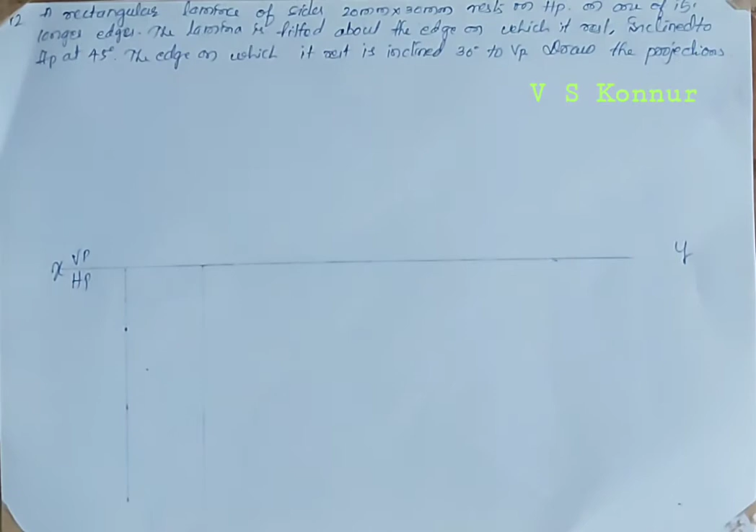A rectangular lamina of size 20 by 30 mm is resting on HP, on one of its longer edges, that is the 30 mm edge. The lamina is inclined to HP at 45 degrees about the edge on which it rests. The resting edge is inclined 30 degrees to VP.

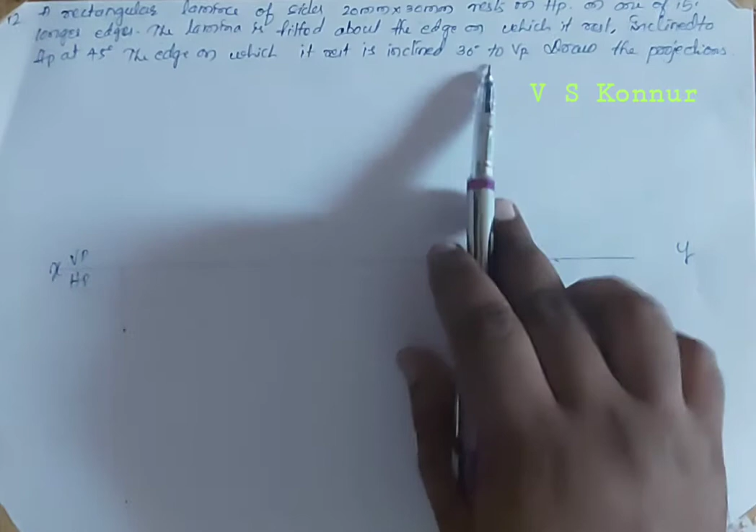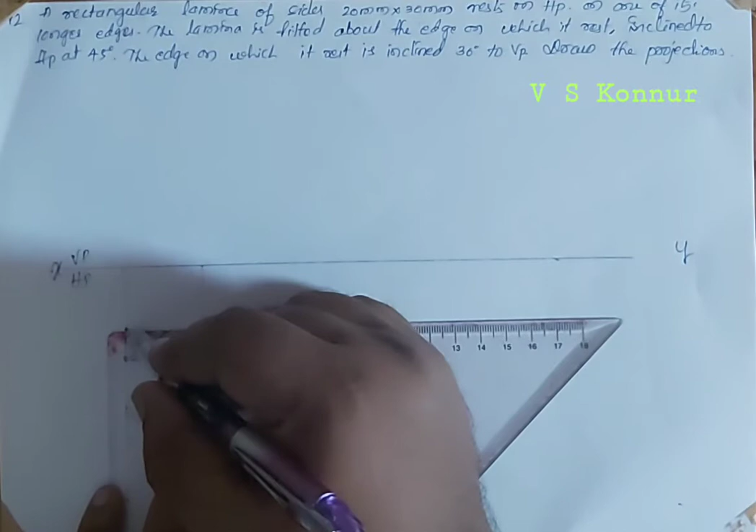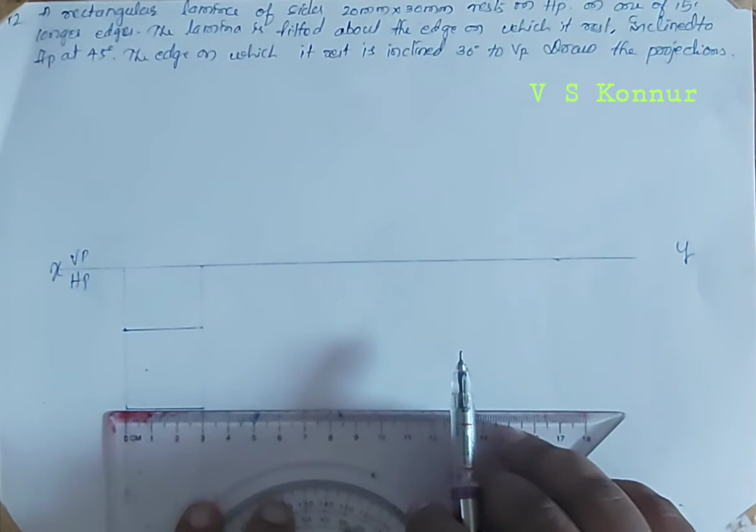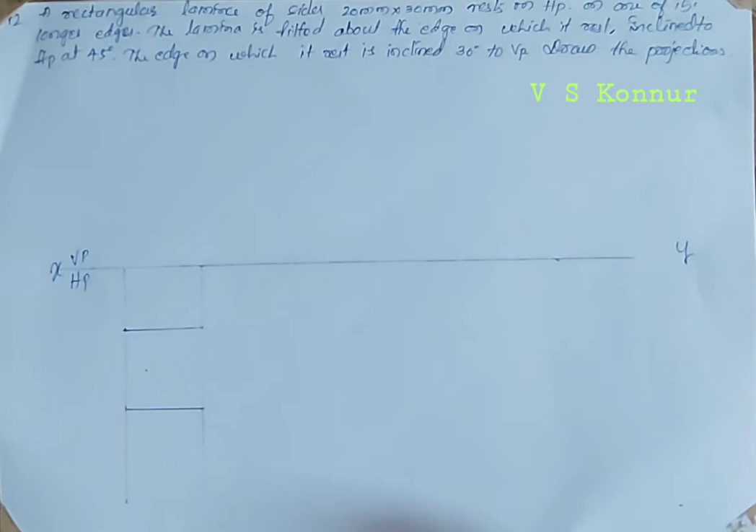So now we'll construct a rectangular lamina of 30 mm side. Mark 30 mm on two vertical lines and construct a 30 mm side lamina, then cut the distance by 20 mm. Now it is 30 millimeter we have constructed. So that is 30 mm. Then divide this length by 20.

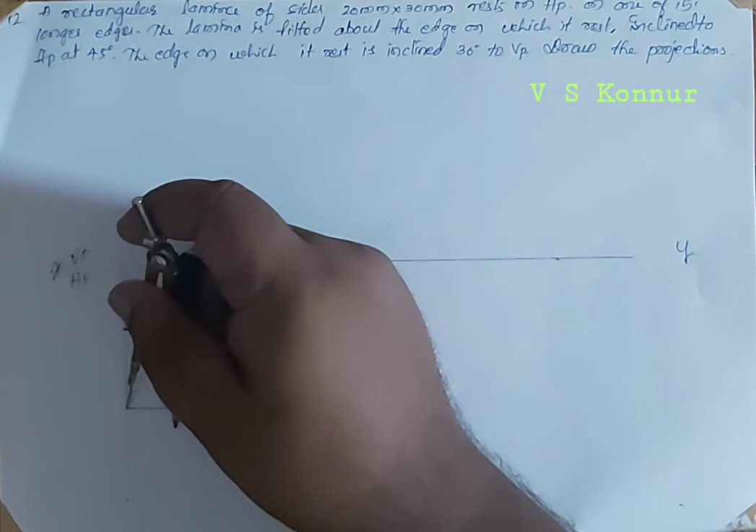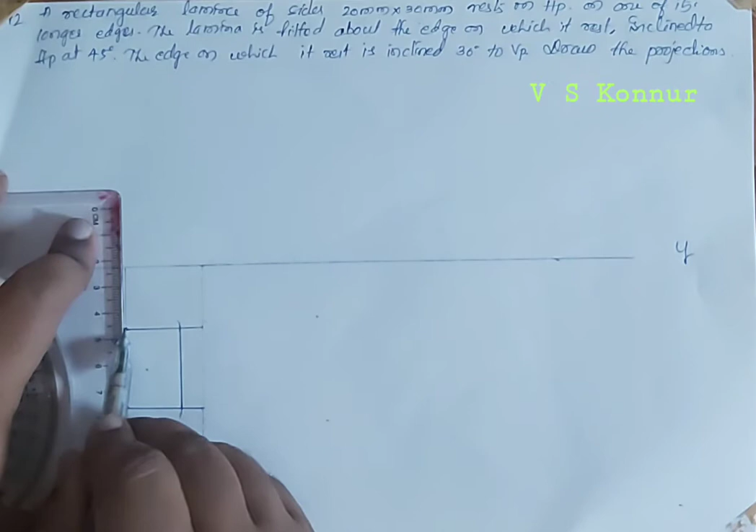Take 20 mm distance because 30 into 20 is there and it is resting on one of its longer edge. Cut the distance by 20 mm on either side, so we get 20 by 30. This darkened part is the 20 by 30 rectangular lamina resting on one of its longer edge, which is the longer edge shown here.

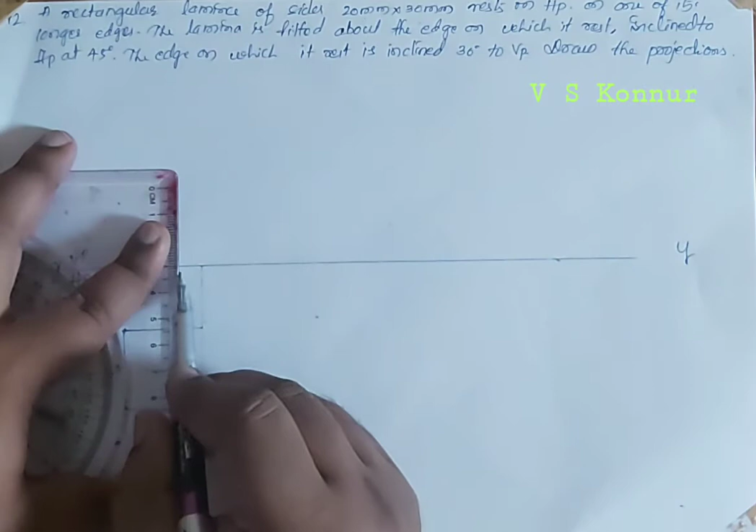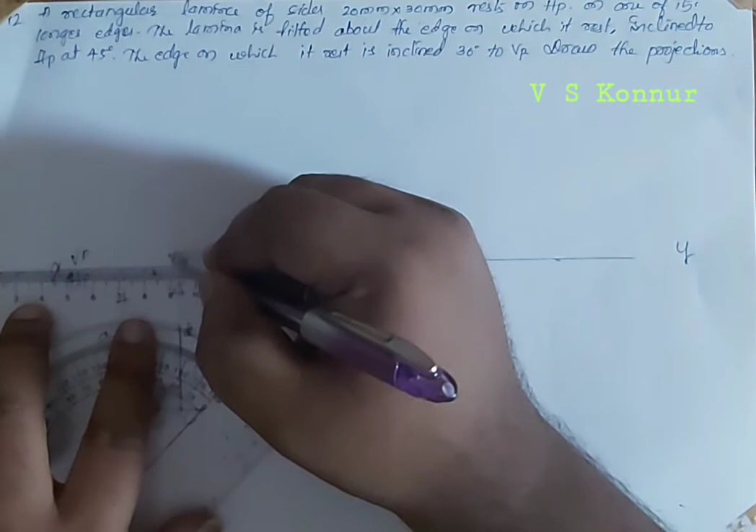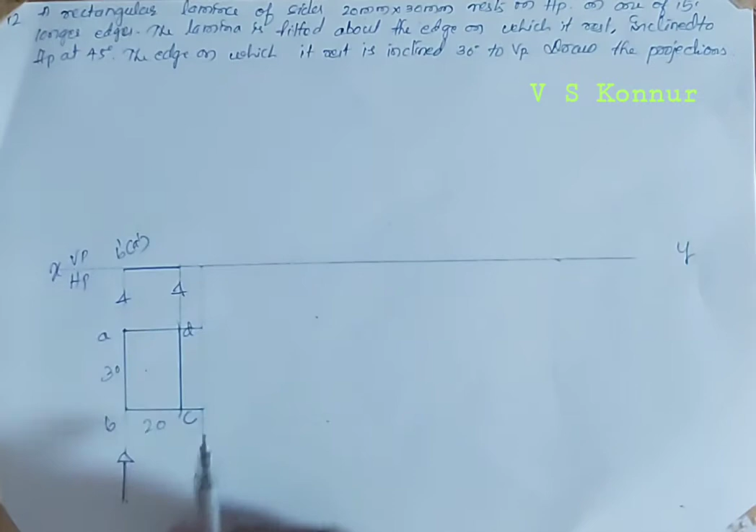Now we'll draw the projectors. So this is A, B, C, D. These are the arrow marks showing how the projectors move from one side to another. When viewing from this side, B is visible, so B dash is outside, A is not visible, A dash is inside. When viewing from this side once again, C is visible, so C dash is outside, D is not visible, D dash is inside the bracket.

Then this lamina is inclined. When it is resting on HP, you should consider the HP angle at the beginning. So it is inclined to HP at 45 degrees. Take 45 degrees, I will mark here and then we'll take 45 degrees from that point.

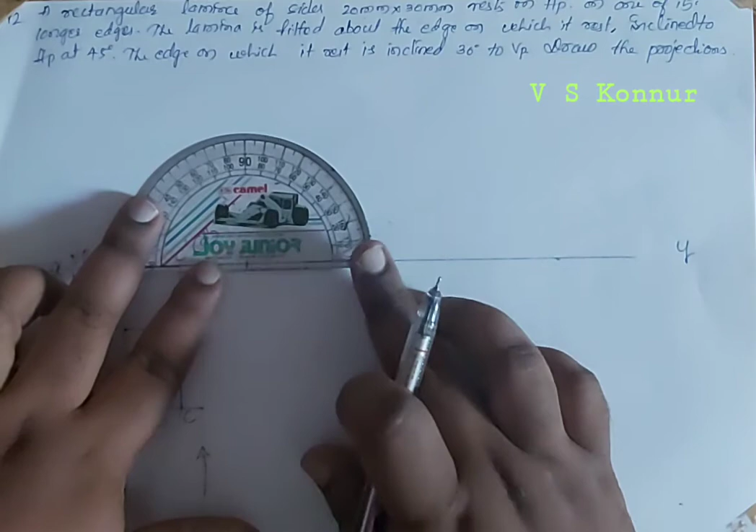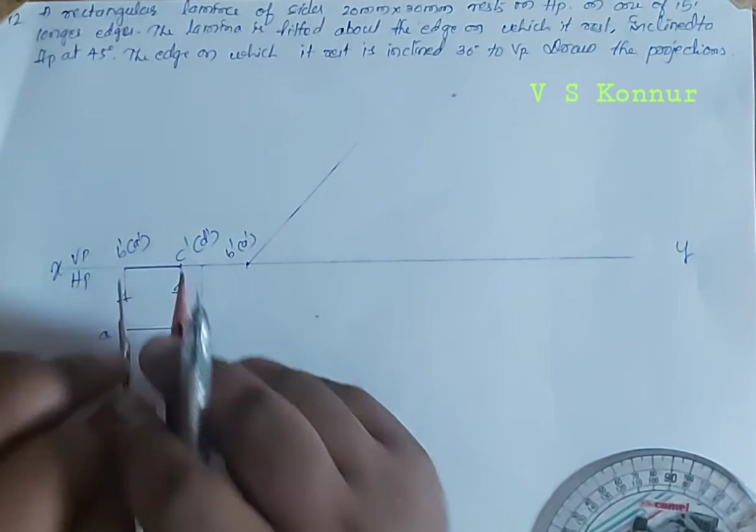Join these two points with thin lines. This point is nothing but B dash, A dash. Take the distance from B dash, A dash to C dash, D dash. This distance you have to take, that is nothing but 20 millimeter, and put at B dash, A dash, cut the 45 degree line by C dash, D dash distance.

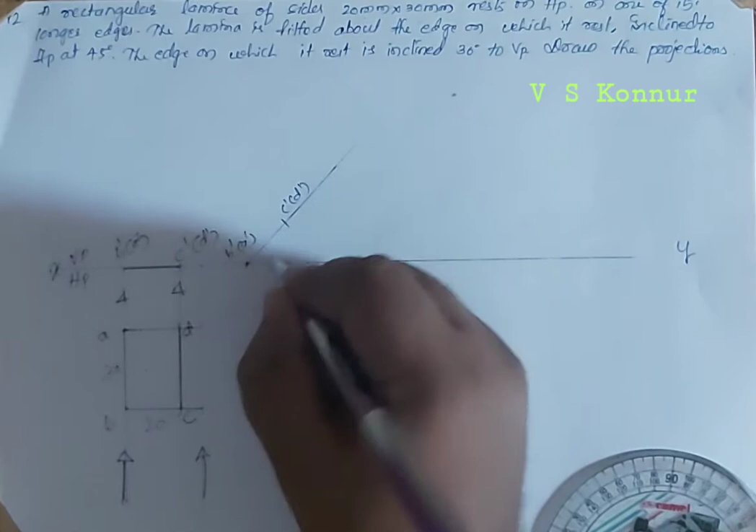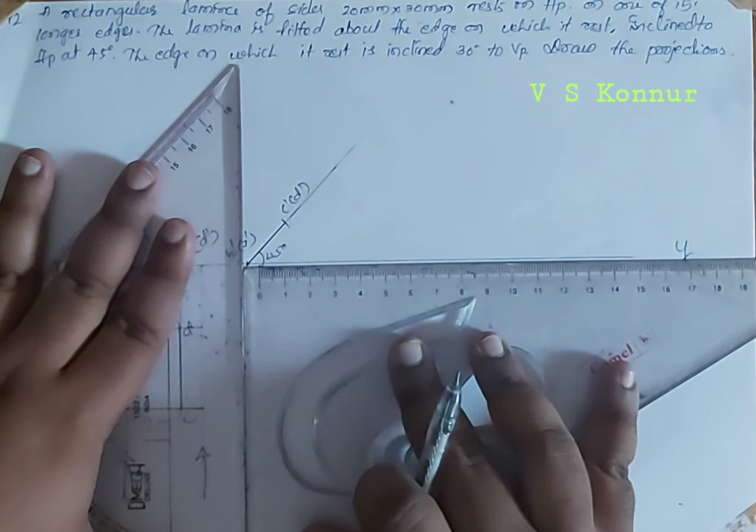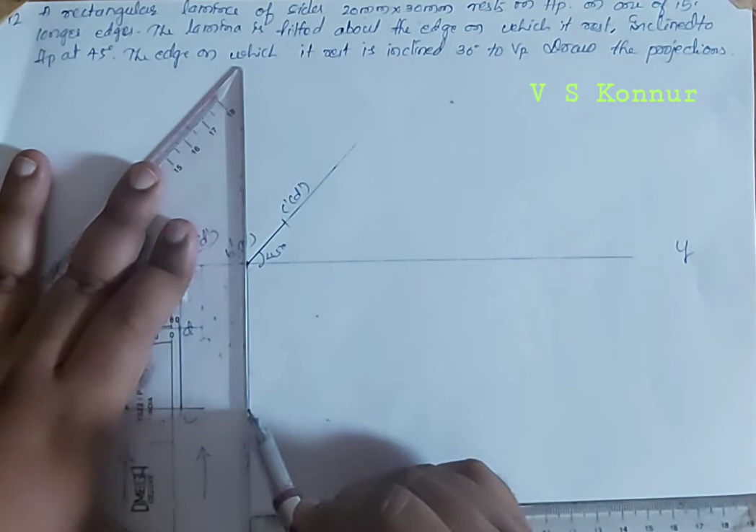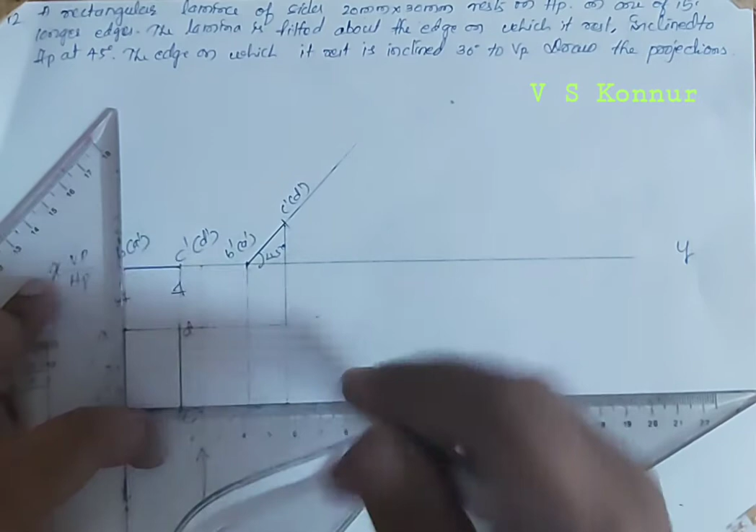This is 45 degrees. Now draw the projectors, join these two points with a dark line because that is the lamina. Now we'll draw the projectors from these points, from B dash A dash, then from C dash D dash. Then from this point we'll take B and A as reference, and A is intersecting at this point, A. So this is A, this is B, this is C, this is D, and give the arrow marks for the projectors.

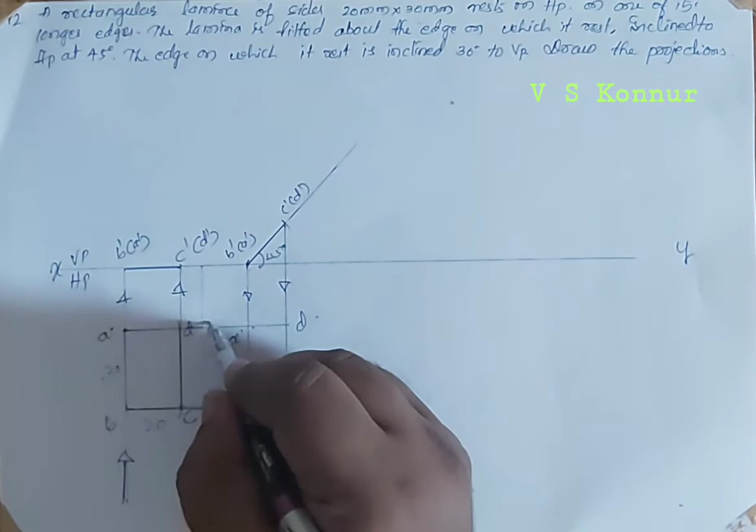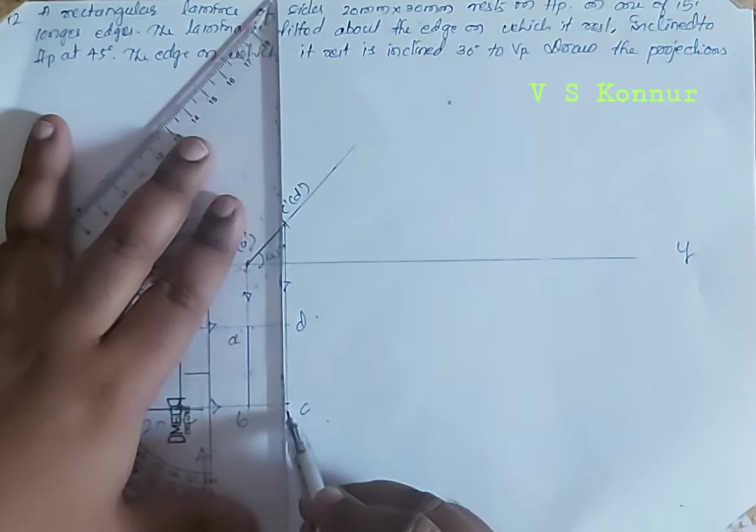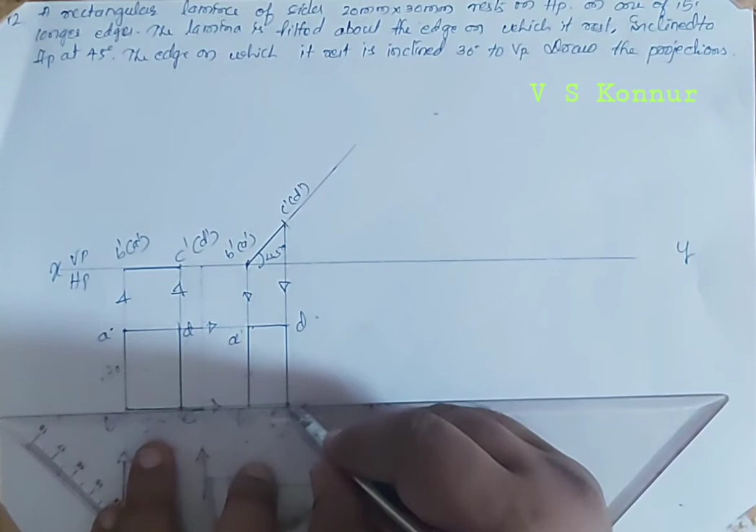Next, mark dark only A, B, C, D. Now, second position, the lamina is inclined 45 degrees to HP. Now third position, the resting edge, this edge, is inclined 30 degrees to VP. So we'll take this side at 30 degrees.

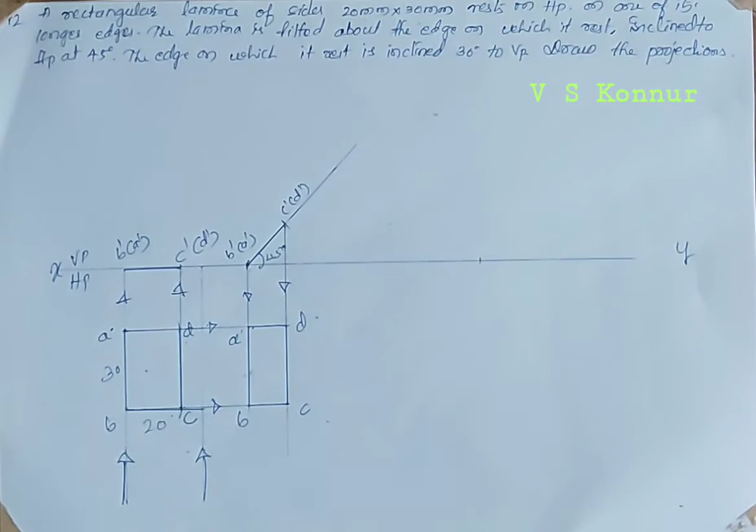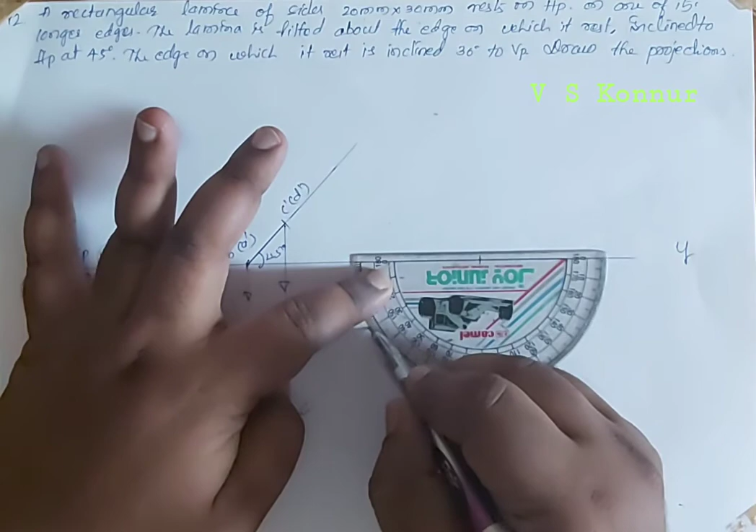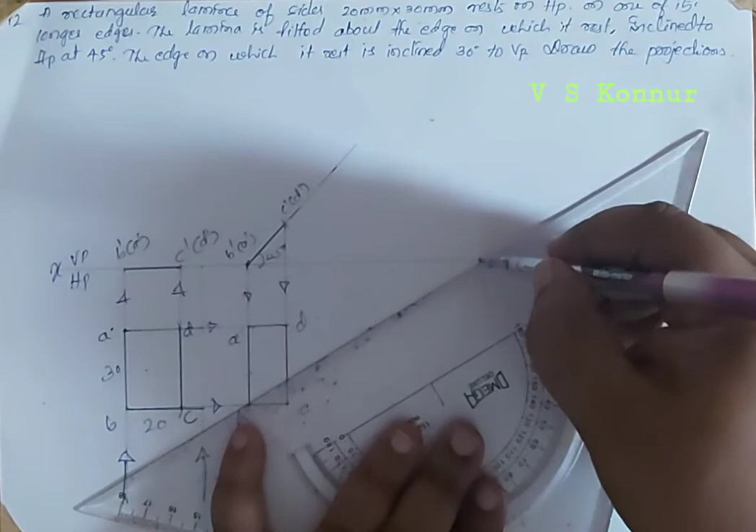From that point we'll take 30 degrees. When it is inclined to VP, we should consider it in HP. We'll draw a line with thin line, and this inclination is 30 degrees. Then we'll mark point A, because this resting edge is inclined 30 degrees as given in the problem. The edge on which it rests is inclined 30 degrees to VP. This is the edge which is resting, and this edge is inclined 30 degrees.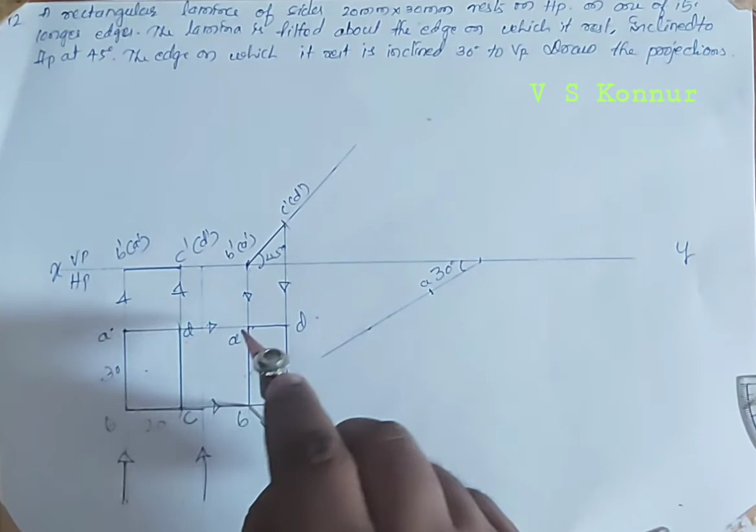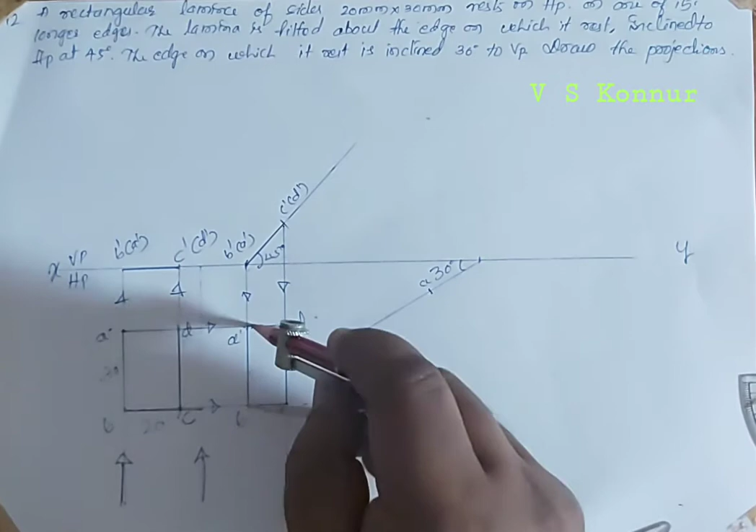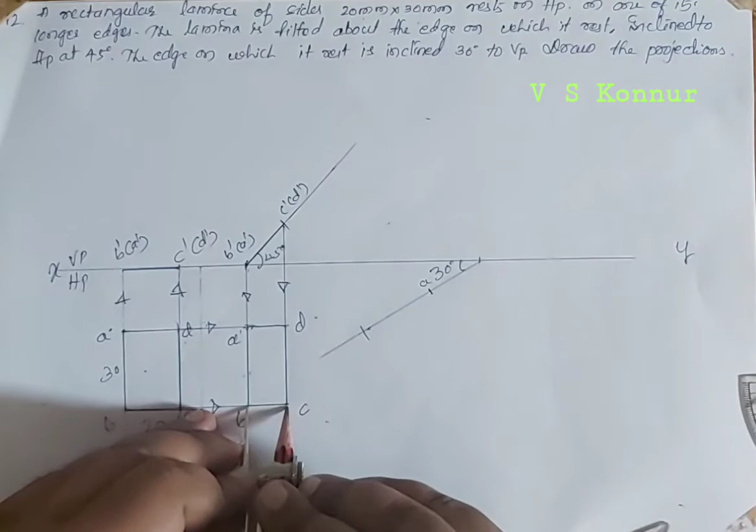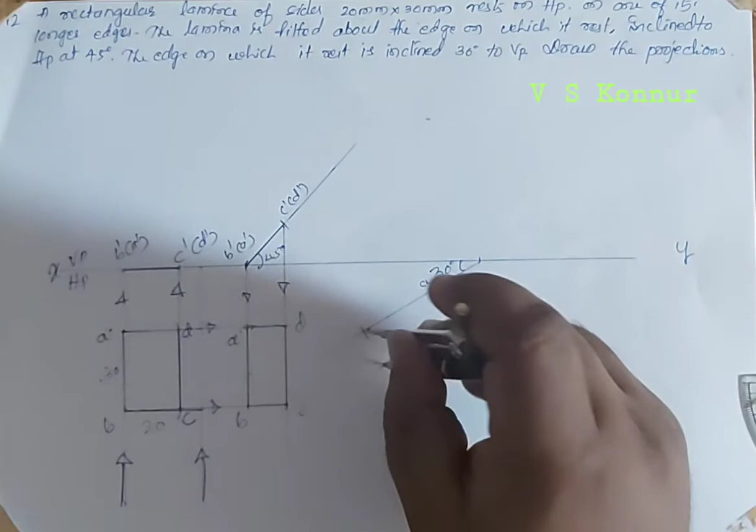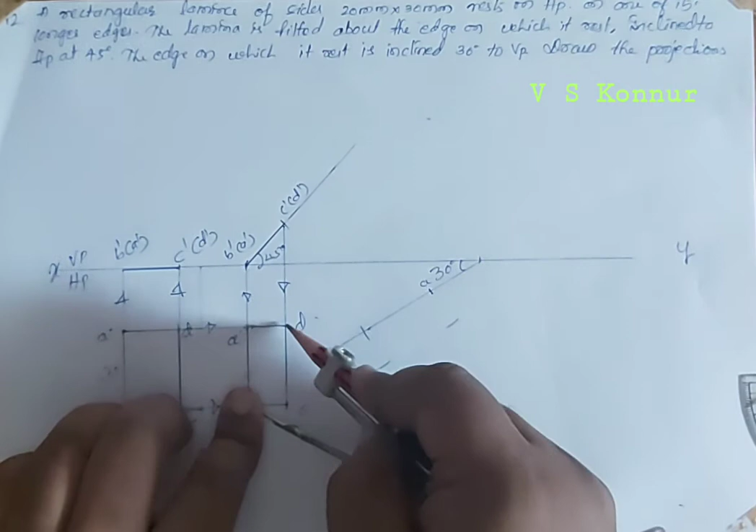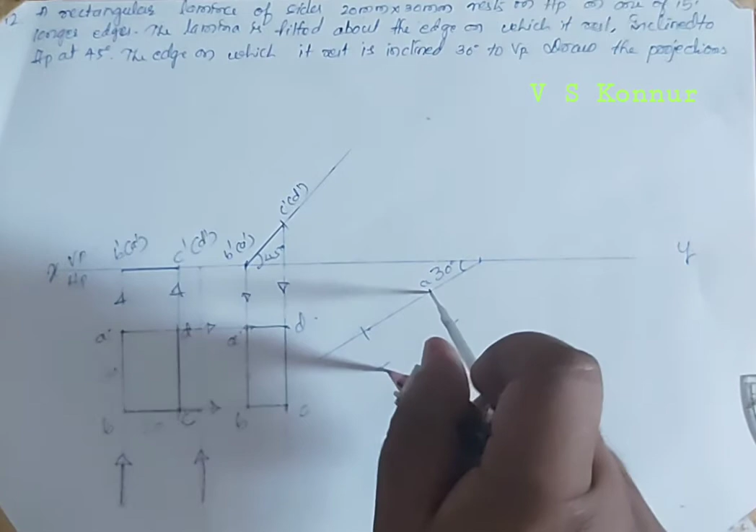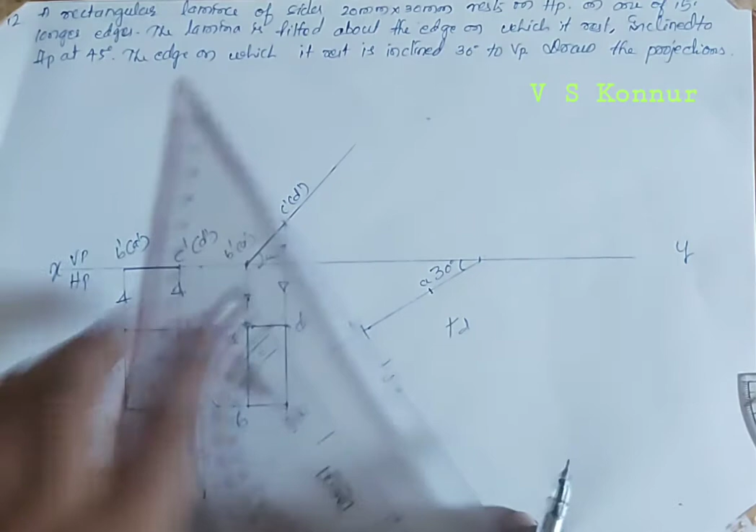Then take distance from the opposite diagonal corners, from B to D. This distance and A to C distance are both the same, so we'll take from A and cut this arc, and from B cut the arc, then join all the points. So this is point B, this is point C, this is point D. Now we'll join these points, and we got the same rectangle at this position.

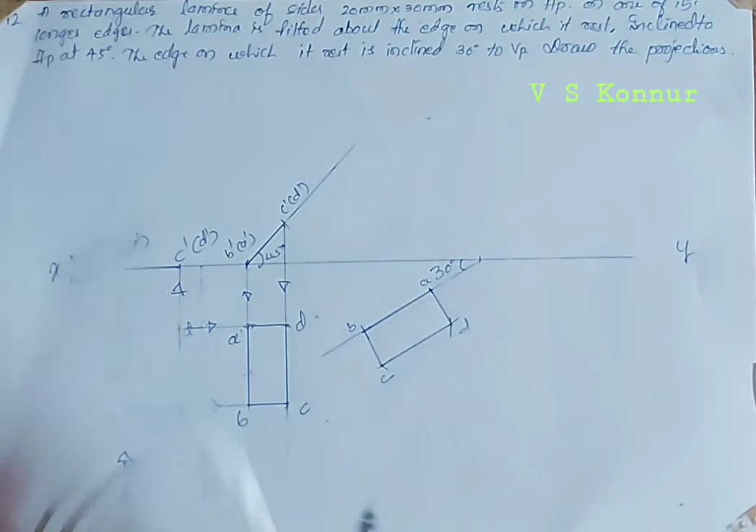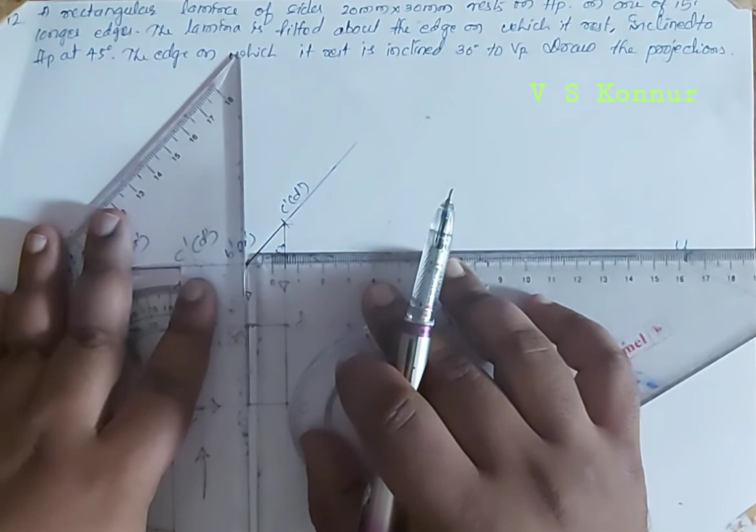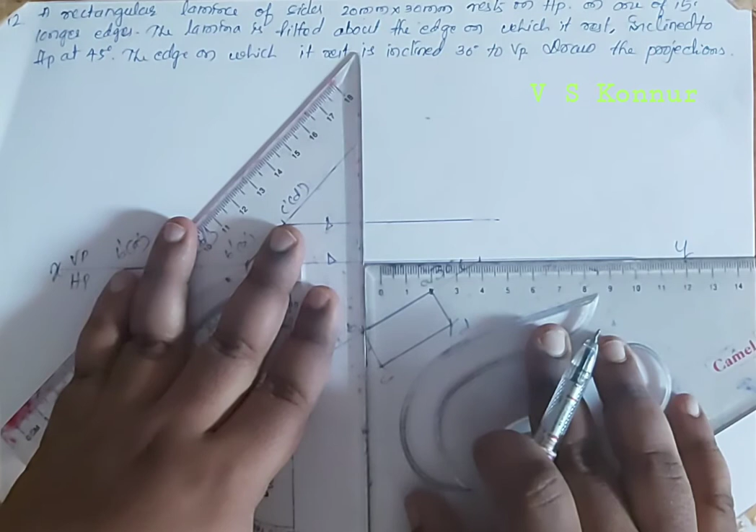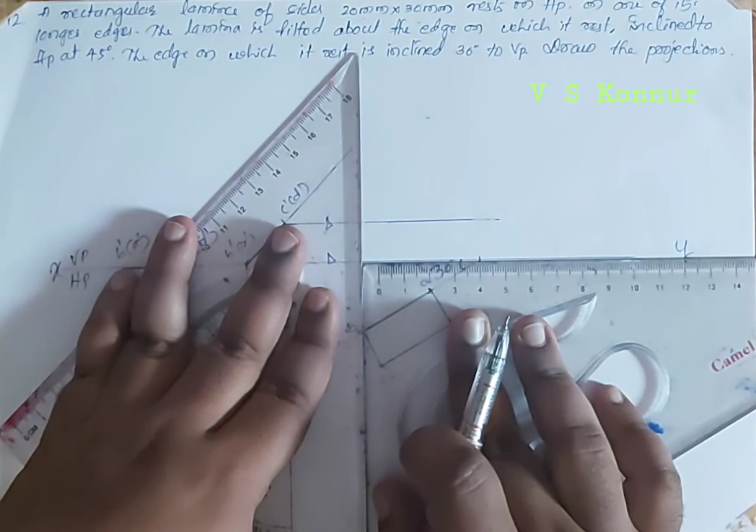Now we'll draw projectors, because the resting edge is inclined 30 degrees with VP, so taking this as reference, we'll draw projectors. From CD I will draw projectors. A has already been drawn, and we'll give the arrow mark for these, then draw a projector from B, from point B till it intersects B. B is on the XY line.

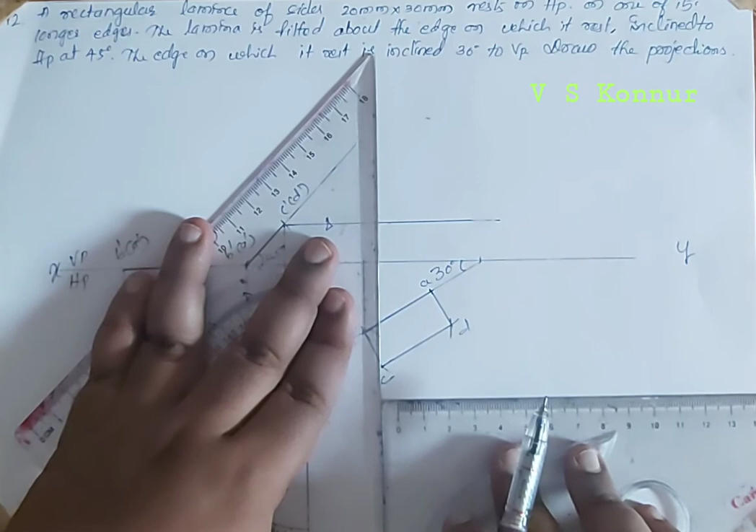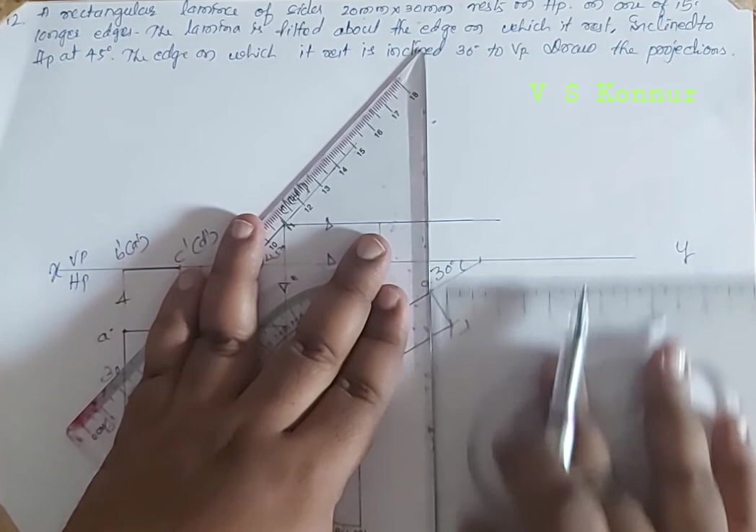Then we'll move on to C, so this point. Then we'll move on to A, so A is on the XY line. Then D, so D is on this point. Now give the arrow marks.

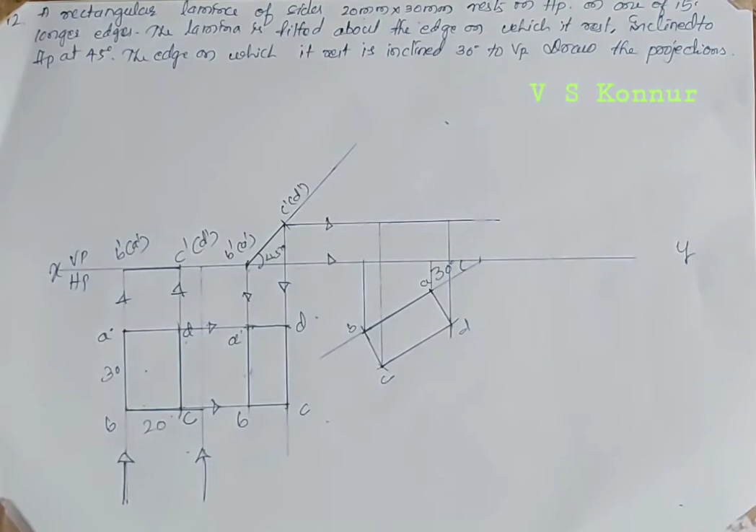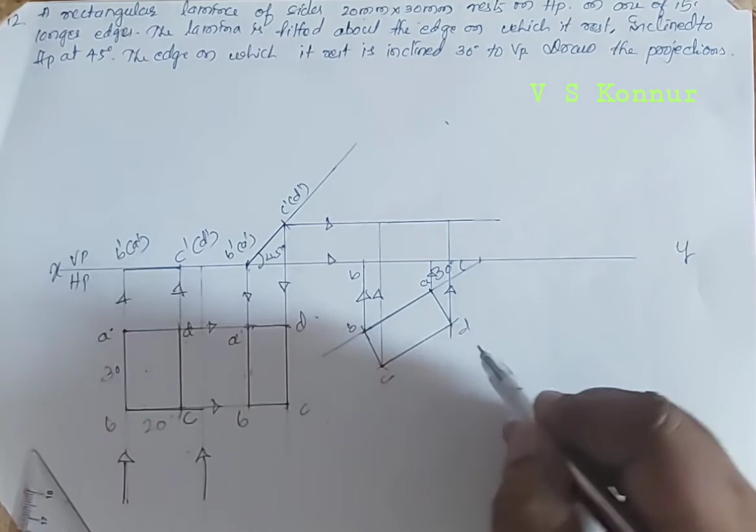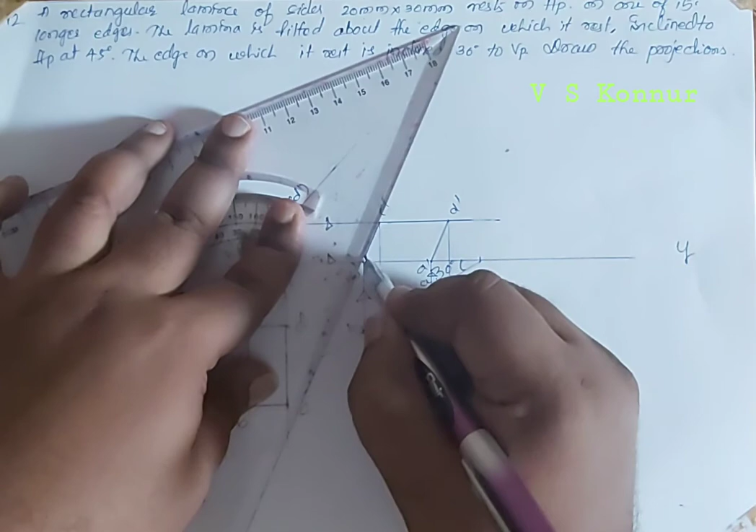Then join A, so this is B, B is here, that is B dash. Then A is here, A dash. C, C dash. D, both are joining here and intersecting at that point, that is D dash. Now join A, B, C, D. So A to D, C to B, then D to C with dark line, A to B with dark line.